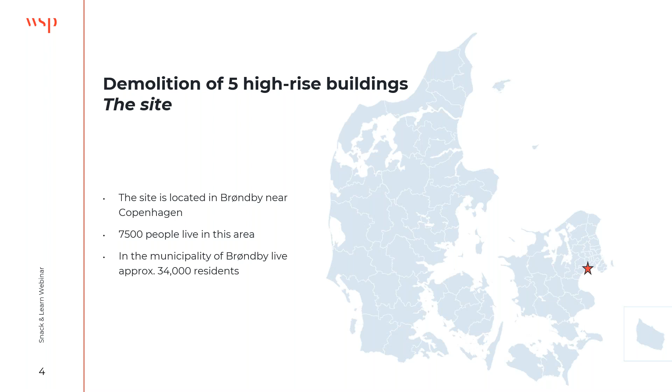The 5 high-rise buildings are located in a city called Brøndby, which lies near the capital of Denmark, Copenhagen. In this city of Brøndby live about 34,000 residents in all, but more or less 25% of these people live in the area of Brøndby Strand, which is the name of the area where these 5 high-rise buildings are located.

Here we have the area seen from the crane, 65 meters above ground. You have the high-rise buildings here - there are 12 of these. Then there are 66 buildings with 4 floors, and 8 terrace house buildings with 2 floors. It's quite a big area where these buildings are located. The area was built between 1969 and 1974.

Therefore it was planned that the whole area needed to be renovated, and it actually was the plan from the beginning that all 12 high-rise buildings needed to be renovated. But when the plan began and some sampling was done, it was found out there was a lot of PCB in the 5 easternmost high-rise buildings, and therefore it was not possible to renovate, so it was decided to demolish those 5 buildings.

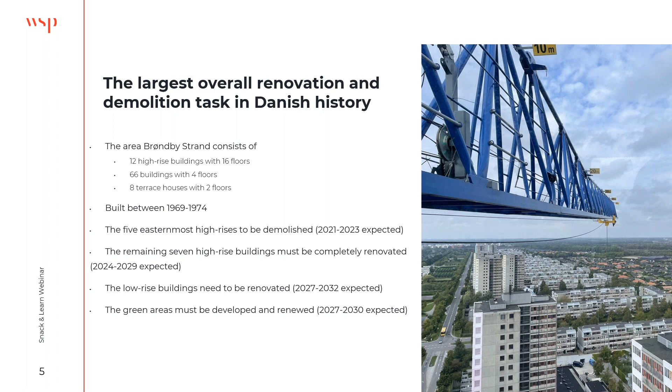The rest of the 7 high-rise buildings will be renovated, as well as the lower houses. All the green areas will also be developed and renewed. So it's a long plan for this area.

WSP has been involved with this contract since 2017 and it is still ongoing. There are actually 3 clients for these 5 buildings: Brøndby Almennyttige Boligselskab, Postfunktionærernes Andelsboligforening, and Bovest, which are all housing associations with a lot of people living in them.

Many of you probably know the problem with PCB. It has been forbidden in Denmark since 1977, but it was used in a lot of building materials. Elastic sealing is one of the primary products used, and it's also the one that was used a lot in these buildings. It was also in the thermal windows and in paints.

It's also been found under the floors where the ceiling had been - it looked like it was almost filled out under the floors. It's a toxic substance with low acute toxicity. It can be absorbed by contact, inhalation, and by food, and it's probably carcinogenic and a hormone disruptor. So it's not a good thing to have in the building or be in contact with.

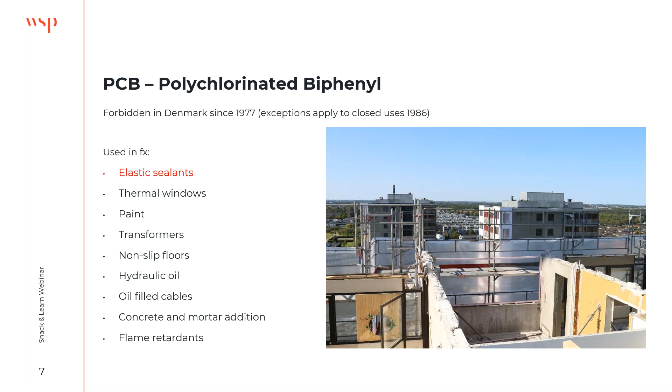Before we got the contract for the demolition, we were involved in sampling in the apartments. What you see here is the sampling of indoor climate in nanograms of PCB per cubic meter. You can imagine the high-rise building - you have the floors here, and the apartment numbers out here, and in this apartment where sampling was not done, it's the blue one.

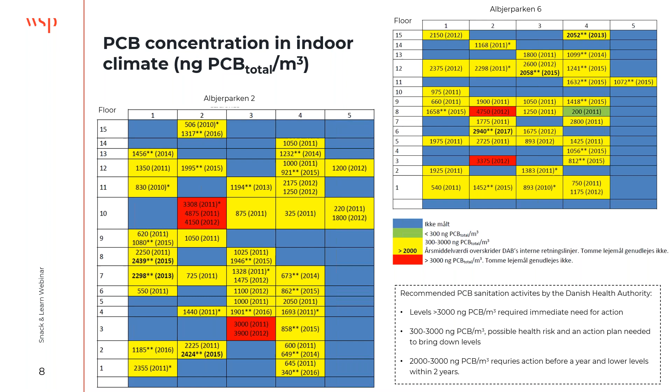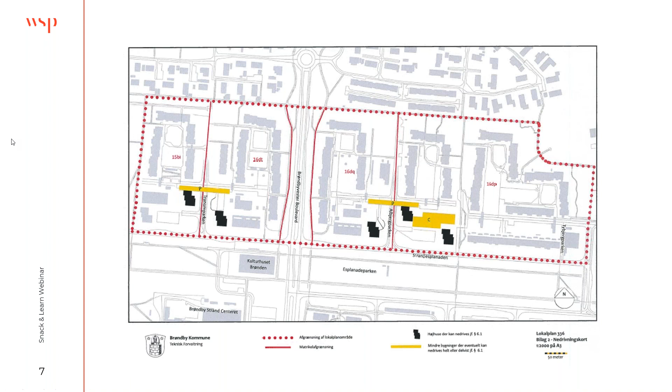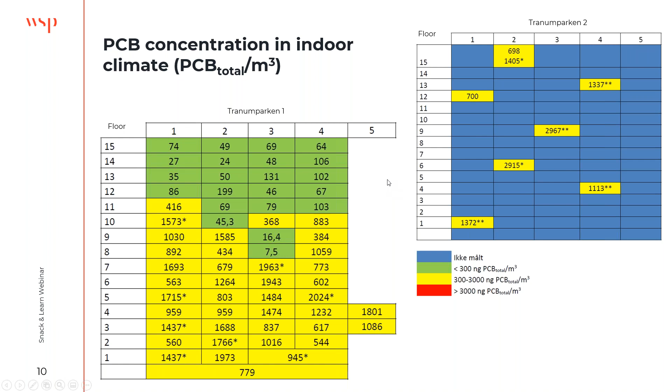You can say why it's only the 5 buildings and not all 12, and that's because in the oldest buildings we found PCB in high concentration. Actually in the 5th building, on the 12th floor and upwards, it was stopped using PCB in the ceiling and so on. So it's not that high concentration there, and therefore the last 7 high-rise buildings are not being demolished.

As I mentioned before, WSP have been involved in the project since 2011 by sampling and testing for PCB. And since 2017, we've been involved as an expert for demolition, engineering and environmental engineering for how to plan and do this kind of demolition.

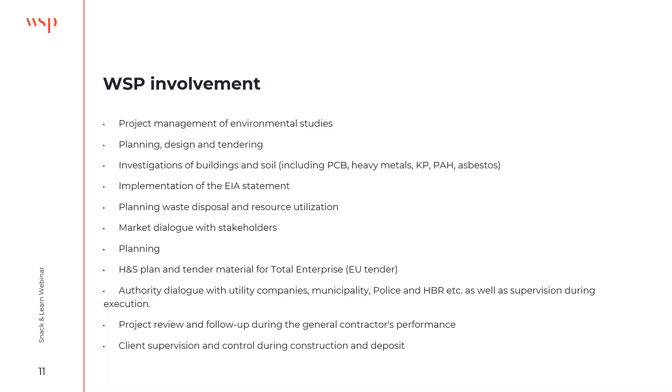Now I have talked a lot about why the building needed to be demolished, and now we'll try to tell about how we are doing it.

The building demolition is a selective demolition, which is a gentle separating of the buildings, so there's not that much dusting and so on. It's a very controlled demolition, and the buildings are first of all emptied for everything: inventory, kitchens, heating, installations, and so on.

And then necessary remediation is done, for instance, for asbestos. Then you have built up the scaffold, and afterwards the 65-meter high crane lifts elements down one by one.

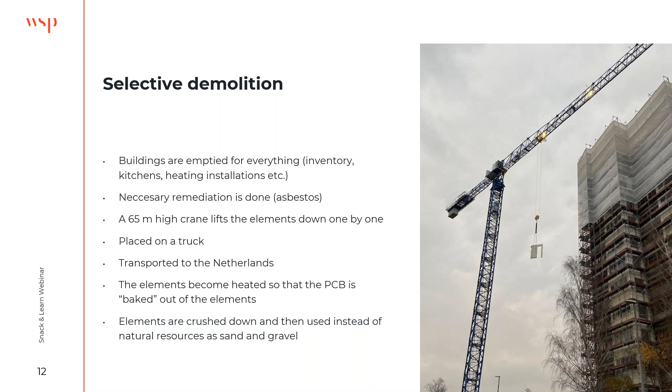You can actually see it here, there's a door hole here, so it's an inside wall. The crane is lifting it down, and then it's placed on a truck, transported to the Netherlands, where they have a facility where they can bake or heat up the elements so the PCB will evaporate faster, and then it's crushed down and used instead of natural resources like sand and gravel.

Around the buildings you have a scaffold with netting and plastic on it. That's to avoid dust spreading and smaller parts from the elements and the knocking down, so it will not fall all over, so it's controlled.

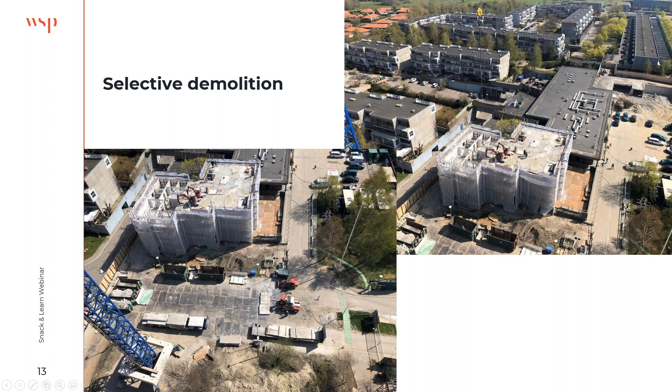The key challenge, you can say, is that you have such a high building which is deeply contaminated with PCB, and it's also located in a densely populated area. So there's really a good need for planning and for good dialogue with the landlord, municipality, the residential association, demolition company, and so on. That is needed in the beginning of the project and in the planning, but also now when the project is ongoing.

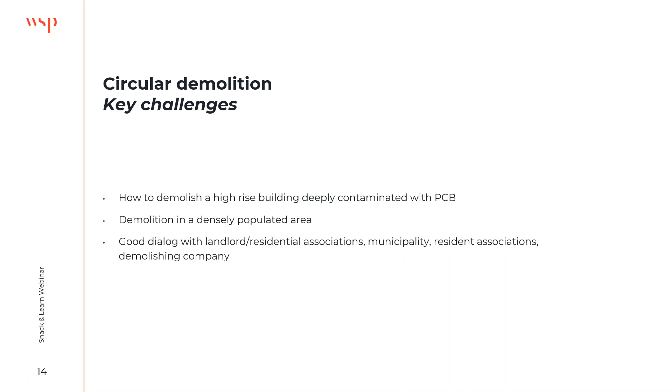Some key takeaways from this project: thinking circularly, we've been able to utilize a large amount of concrete despite the PCB contamination. There's approximately 30,000 tons of PCB-contaminated concrete, which we've handled by transporting it to the Netherlands since we don't have these facilities in Denmark. But this has sparked innovation ideas for building smaller facilities here, so we can reuse more materials in other buildings or crush it down to get rid of the PCB.

Throughout the whole project, we've been very focused on health and safety, including safety for the workers on site, but also in the surrounding area and for the residents. There have been people living there and children playing nearby, not on the construction site itself, so it's been very important that we have it under control at all times.

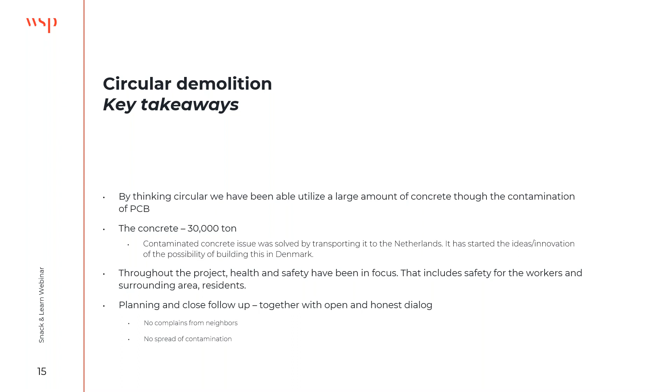So I think it's an exciting project, and we've learned a lot throughout this, more or less, 10 years we've been involved in the project.

So I don't know if there are any questions.